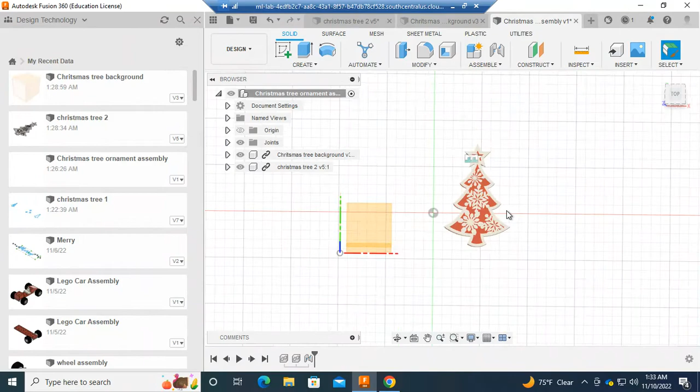Hey, today I'm going to show you guys how to create an assembly. And it's going to look something like this. So this is going to be your two components of your ornament that you're going to assemble together.

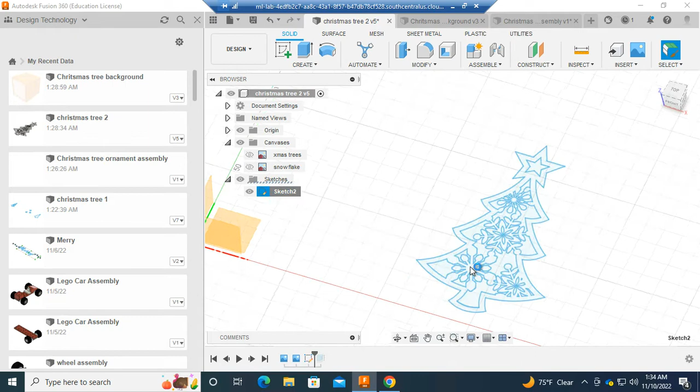The first thing you're going to do is take your sketch and give it some volume. I know some of us have been having a hard time finding the blue surface, so I'm going to show you guys how to fix that. I'm going to edit my sketch. In here, if I click off profile, that's where you can see the blue surface. So I'm going to fix it that way.

Now I'm going to extrude it. I'll click on extrude, click the surface, and then give it a depth of 3 if I'm doing wood. If you're doing clear acrylic, it's going to be a depth of 6. You can see here I've already done it, with an extrusion or protrusion of 3 millimeters.

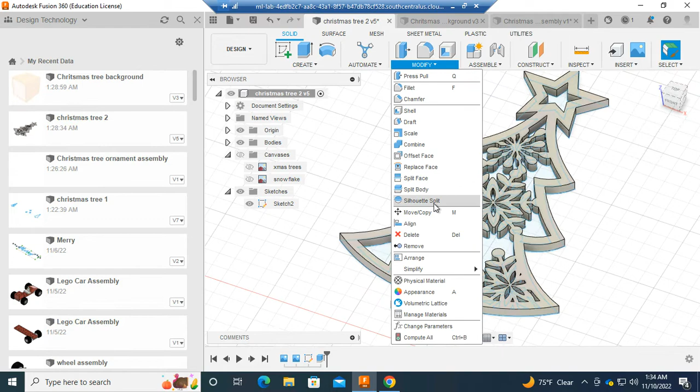And then if we hide our sketches, you can see that that's what it looks like. I've gone and made it white because that's the color I want to paint it. I actually made it wood material because that's what I want to make it out of.

In here there is a folder that's wood, I think it's way at the bottom. Oh my goodness, if we go all the way to the bottom, almost there, you've got wood. You can make it either birch or MDF right there, and you can also make it a color. So I've already made it wood.

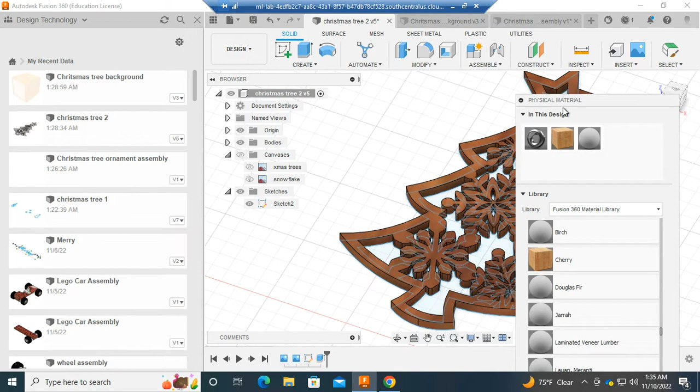So what I'm going to do, if I make it birch here, I'm just going to drag it onto that. Then the next thing I'm going to do is paint that birch, so I'm going to change its appearance and make it white. There we go, all right, and then I'm going to save it.

Okay, so now I've got one component, so that's maybe my first layer. I go and do the exact same thing with my other layer, give it the thickness of the material, and then I made this one red.

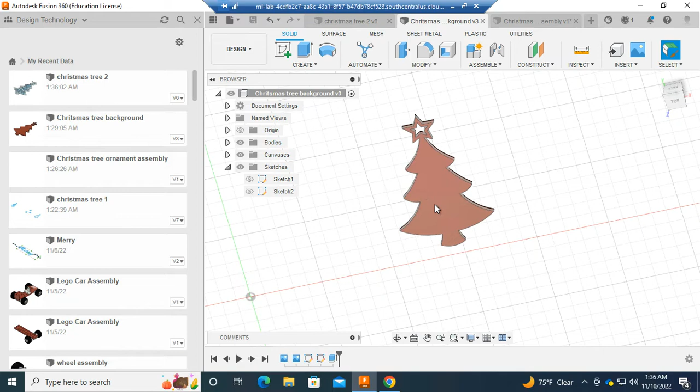Okay, so the next thing I'm going to do is create a third component in Fusion 360, but it's actually going to be an assembly, and I'm going to show you guys how to do that right now. So if I go all the way back to the beginning, I have nothing, okay.

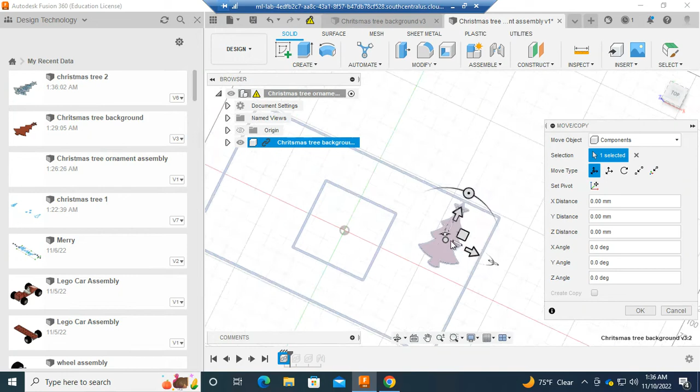So what I do is I just bring in my back layer first. I drag it in, I can put it anywhere because it's the very base layer, so I can just sort of move it around and press OK. Then the next thing I'm going to do is drag in my front layer, and I can sort of place it on top. That's not really what I want to do, I want to get in the general area.

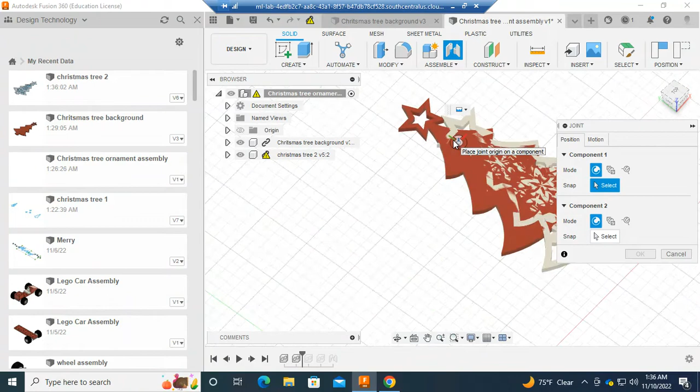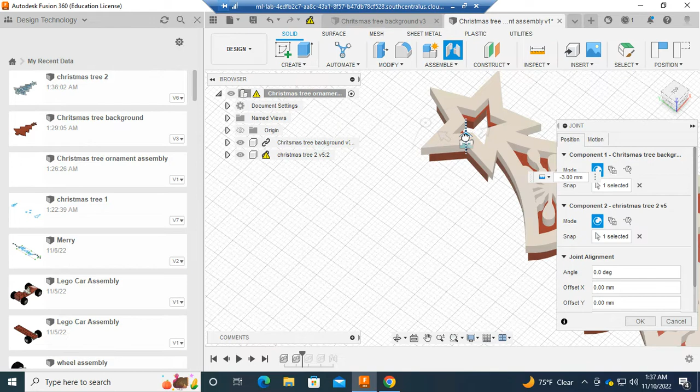Then what I'm going to do is actually create a joint. I want to click this joint right here, and then click that joint there, and then just move it up a little bit so you can play around with it. Now mine don't quite match up the way that they should, just because I played around with it quite a bit. So I've got my joint there, and I want to make it a stationary joint. Now I've got my two components assembled.

So that's what you guys are going to do for your assembly for your final drawing. If you've got any questions, ask me in class. Thanks.